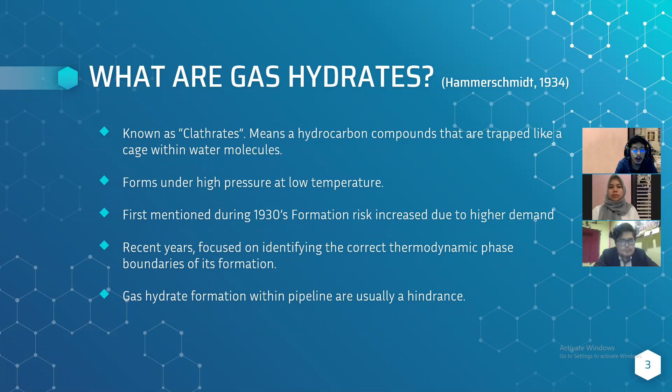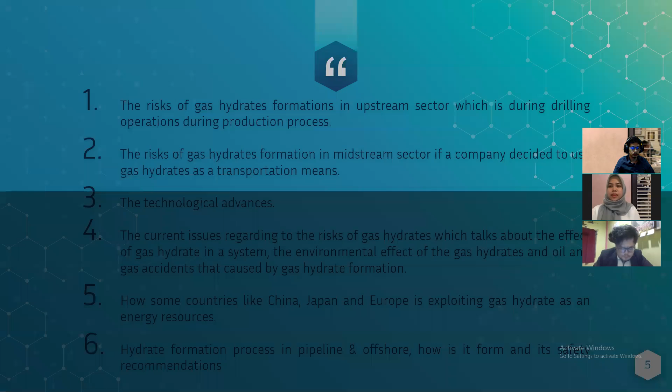It talks about the effect of gas hydrate in a system, the environmental effect of gas hydrate, and oil and gas accidents caused by gas hydrate formation. Then we also talk about how some countries like China, Japan, and in Europe are exploiting gas hydrate as an energy resource. Lastly, the hydrate formation process in pipelines and offshore, how it is formed, and its safety recommendations. Discussions, risks, technological advances, current issues, moving forwards, and many more.

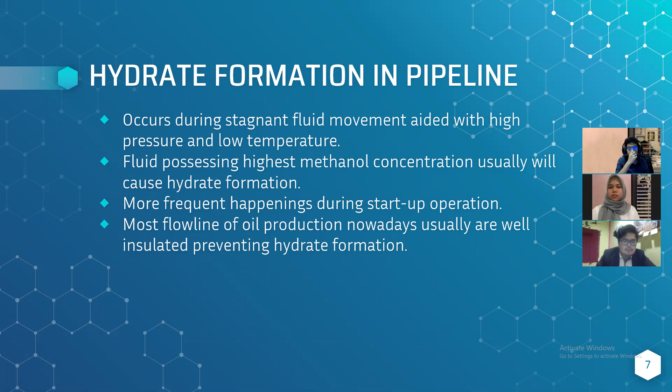Hydrate formation in pipelines occurs during stagnant fluid movement, aided by high pressure and low temperature. Fluid possessing the highest methanol concentration usually will cause hydrate formation. It happens more frequently during startup operations. Most flow lines in oil production nowadays are usually well insulated, preventing hydrate formation.

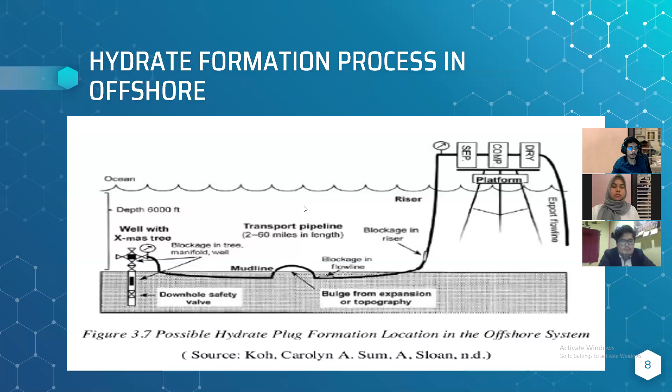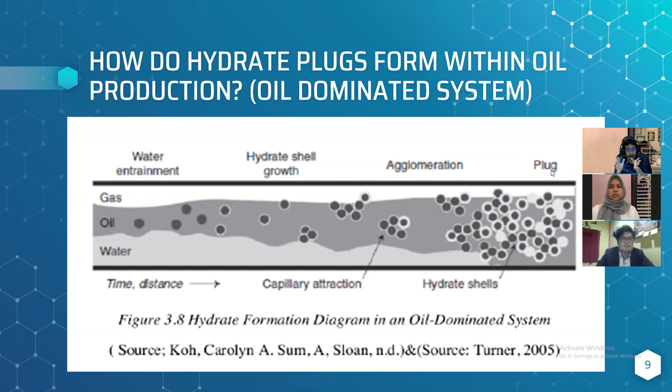Right. Next, this is a typical diagram showing how hydrate plugs form within oil production. There are three phases: gas, oil, and water. As time passes, when it's flowing slowly, a hydrate shell will grow, causing the oil, gas, and water to agglomerate, making a crystalline structure that finally turns into a plug, which causes obstruction of flow.

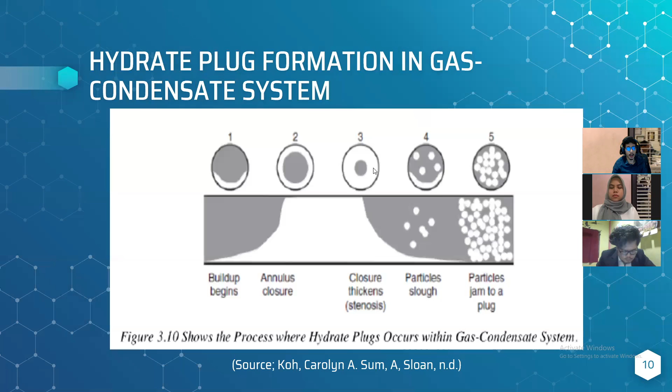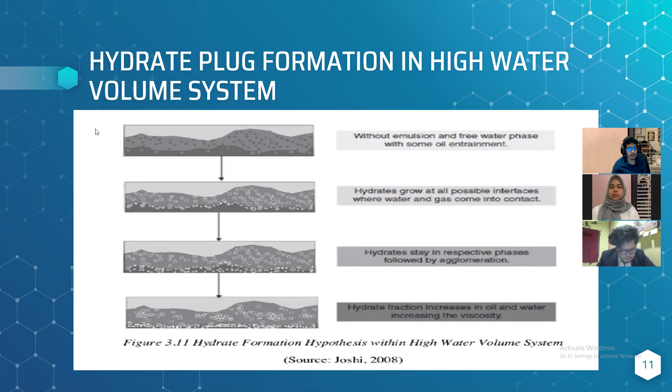All right. So this is for a high water volume system. This is a hypothesis because finding hydrate formation in high water volume systems is quite rare and hasn't been extensively researched.

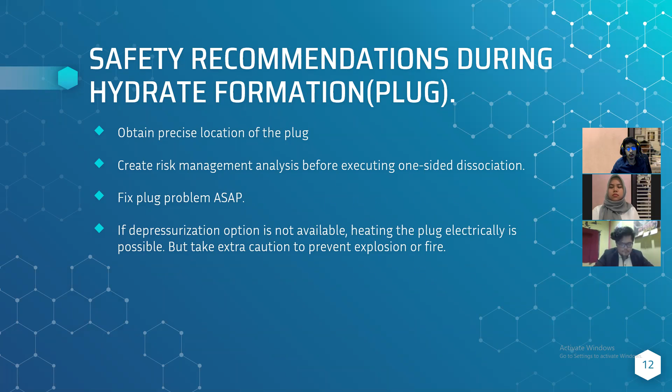Okay, continuing with the risk of gas hydrate formation in the upstream sector. Gas hydrate can form at high pressure, low temperature, low light gas concentration, and also high water concentration. The risk to the production pipe string will cause a low gas production rate and a variable temperature environment along the wellbore. The pipeline pressure holding accident is caused by hydrate formation, and pipe string deposition will directly reduce the fluid flow passage and cause pipe string blockage.

The blockage in tubing during drilling operation will interrupt the operation of the blowout preventer, BOP. Then, little to no circulation in the pipeline. The orifice, kill line, choke valve, or area adjacent to the BOP will be affected.

The equipment that is under the seawater will be affected by the environmental condition, which is low temperature and high pressure that can form gas hydrate. Lastly, the flow lines that are transporting the product will be exposed to heat transfer over time, causing unexpected operational and safety issues.

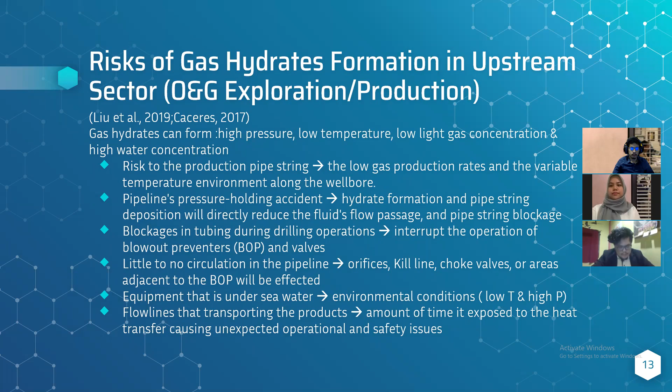Then, for the risk of gas hydrate formation in the midstream sector, there is a risk of natural gas hydrate due to the high volume of natural gas transported through a pipeline at high pressure and low temperature. The internal walls of pipelines for transportation will form hydrates affected by the presence of hematite or rust. It can act as a water adsorption site or as a catalyst to form the hydrate.

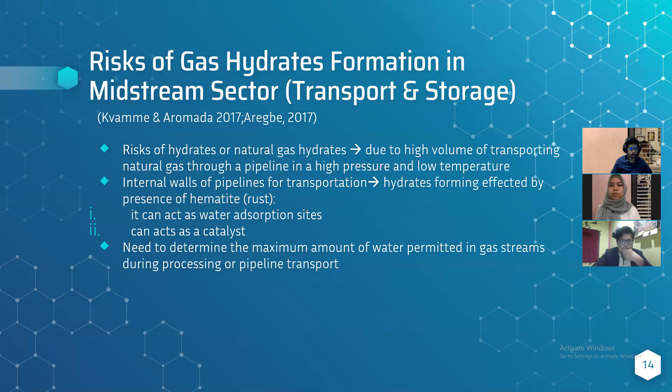There is a need to determine the maximum amount of water permitted in the gas stream during processing or pipeline transport to ensure gas hydrate is prevented.

Then, for the technological advances, first, HyFAST 2. HyFAST 2 is an upgraded version of HyFAST. HyFAST, the previous version, determines the hydrate plug formation algorithm and can rapidly evaluate the severity of a given system.

While HyFAST 2 is able to describe the phase equilibrium, particle size, aggregation, potential slurry relative viscosity, and also the frictional pressure drop for a multi-phase flow. The HyFAST tool is able to execute in only 5 seconds for a 5 kilometer flow line.

Then, CSMHyFAST-A is a combination of CSMHyFAST plus CSMHyK-OLGA. CSMHyFAST employs mathematical modeling to solve the mass conservation equation in conjunction with the energy balance. Then, CSMHyK-OLGA is a transient multi-phase flow simulator that makes use of empirical correlations for the void fraction, pressure drop, and flow regimes.

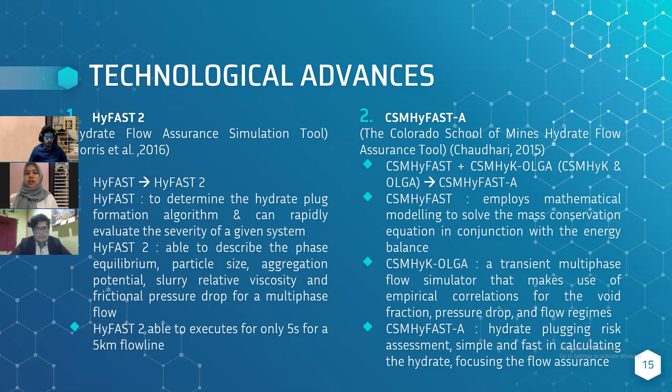Then CSMHyFAST-A is able to calculate the hydrate plugging risk assessment, which is very simple and fast in calculating the hydrate and also focusing the flow assurance.

So this is the simplified algorithm of HyFAST 2. The users need to input parameters such as the pressure, the temperature, the composition, and oil phase viscosity. The software will calculate using nested spatial loops within a period of time. The output result will be the phase fraction, pressure drop, and a measure of the plugging rate.

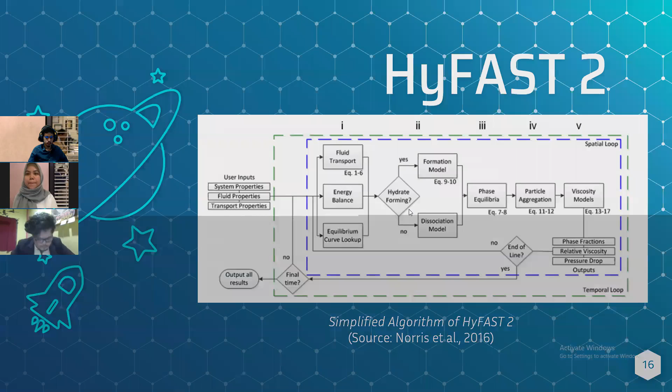So next is CSMHyFAST-A. The users need to input the liquid loading, water cut, initial temperature, pressure, the pipeline geometry, and the flow rate. The software will calculate, and then the output result will be the temperature profile, the phase fraction, pressure profile, and the hydrate plugging onset.

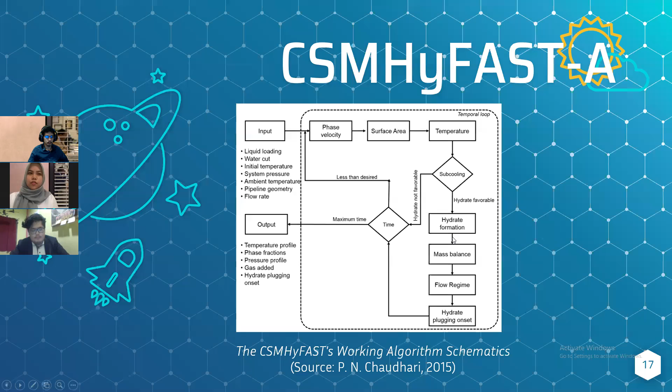So as for the current issue, I will talk about the major concern in the oil and gas industry. As we know, gas hydrate will cause flow assurance problems, which can affect oil and gas transportation into the facilities.

Formation of gas hydrate inside the pipeline causes plugs, and this will disturb the production operations, which affects the rate of production. Gas hydrate will form a solid that eventually will cause a blockage and create an overpressure situation in the pipe. So this can cause damage to the pipe and a blowout can occur.

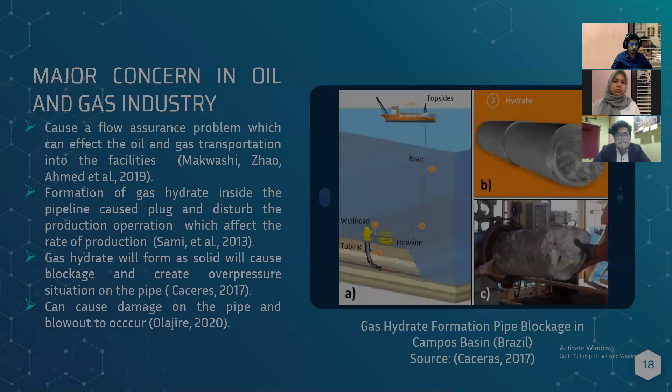So next, I will talk about the environmental impact of gas hydrate exploitation. First, ocean acidification. Ocean acidification can occur because of the reduction of oxygen level. Next, aerobic microbial oxidation of methane will alter the methane and oxygen into carbon dioxide. This CO2 will alter the pH value of the oceans to acidic.

So this acidic pH value will affect marine life such as coral, oyster, clam, etc. This acidic condition of the ocean affects the reproduction process of marine life.

Next, climate change. Climate change can occur by gas hydrate through two ways, which consist of natural activities and anthropogenic activities. Anthropogenic activities enable the gas hydrate to dissociate due to changes in temperature in deep seawater. Natural activity involves the motion of waves due to wind that can trigger gas hydrate seepage.

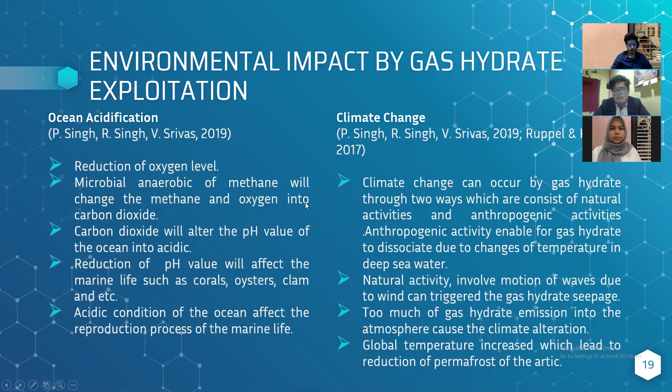Too much gas hydrate emission into the atmosphere will cause climate change. This will lead to global temperature increase and cause the reduction of Arctic permafrost.

So as for the current issue, we're talking about the conferences on gas hydrate development as a future energy. So the first conference is known as Non-Equilibrium Control of the Formations and Dissociations of Gas Hydrate in Natural and Engineered Systems. This conference was held in Hotel Galvez, Texas, by Gordon Research Conference in February

23rd until 28th, 2020. So basically, this conference is a platform for oil and gas companies, government, and academicians to conduct discussions about control, evolutions, and destruction of gas hydrate in engineered systems. So this conference also is a platform for the researchers to present their research papers regarding gas hydrate control

and exploitations. The second conference that I can mention here is the 10th International Conference on Gas Hydrates, which is held in Suntec Singapore Convention and Exhibition Center, Singapore. It was supposed to be held on December 6 until 11, 2020, but due to the pandemic, it will be postponed to

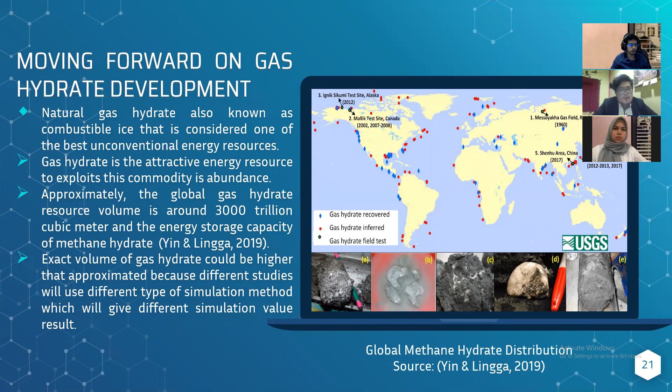So in the whole world, there are around 3,000 trillion cubic meters of energy storage capacity of methane hydrate. The value of gas hydrate could be higher than approximated because different studies use different types of simulation methods, which give different simulation results.

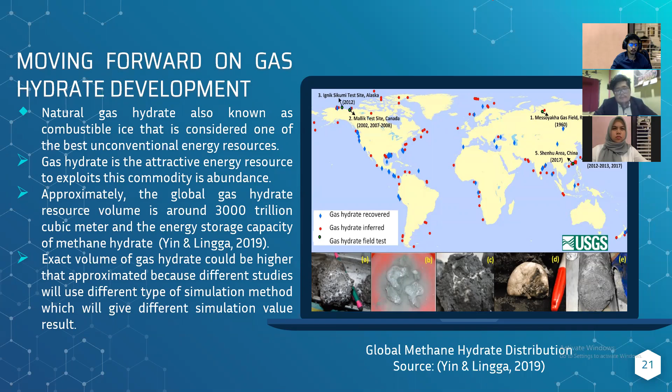So moving forward, gas hydrate development for each country. I will give an example of gas hydrate development in Europe. Gas hydrate exploration in Europe began with the gas hydrate basin modeling technology known as PetroMod.

This simulation software will simulate the generation, expulsion, migration, and accumulation of gas hydrate in order to predict gas hydrate behavior. This software also applies seismic applications in order to detect the gas hydrate, by comparing the standard 3D seismic and 3D P-Cable seismic methods. This research shows that standard 3D seismic shows a more clear, detailed image of the subsurface structure.

Next, gas hydrate development in China. China was a pioneer for the world's first solid fluidization well testing for natural gas hydrate in the shallow layer of the deep sea. Gas hydrate is broken down into slurry by mechanical forces and goes to the surface via a riser. Gas hydrate dissociates due to an increase in temperature and a reduction in pressure.

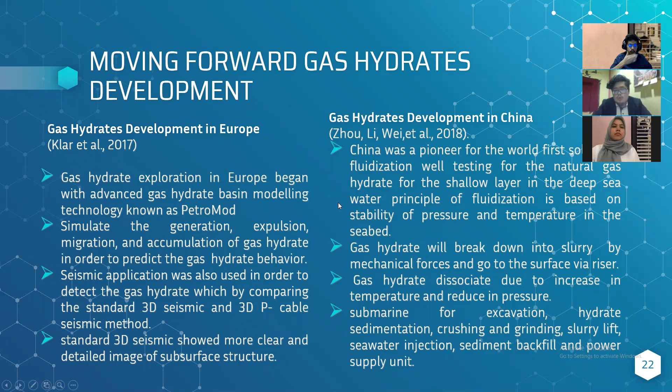In this method, submarine units for excavation, hydrate sedimentation, crushing and grinding, slurry lift, seawater injection, sediment backfill, and power supply are required to conduct this development program.

So as for conclusions, gas hydrate is an abundant energy resource that has good potential as a future energy to fulfill the increasing energy demand. Gas hydrate is an abundant energy resource, but most probably engineers will always encounter gas hydrate problems. Controlling gas hydrate is still a big problem for engineers to handle, as it can cause major problems such as pipe plugging, especially in upstream processes.

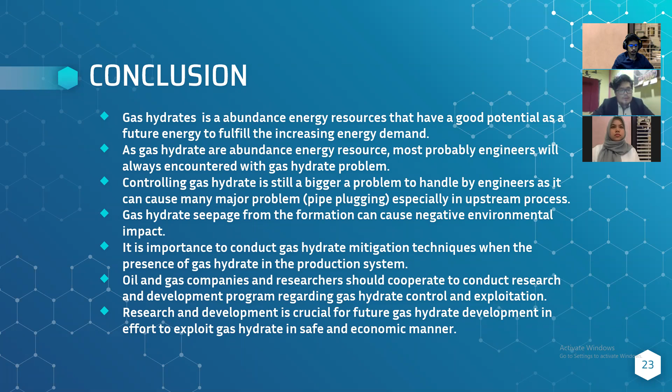Gas hydrate seepage from the formation can cause a negative environmental impact. It is important to conduct gas hydrate mitigation techniques when gas hydrate is present in the production system. Oil and gas companies and researchers should cooperate to conduct research and development programs regarding gas hydrate control and exploitation. Research and development is crucial for future gas hydrate development and the effort to exploit gas hydrate in a safe and economic manner. That's all from us.